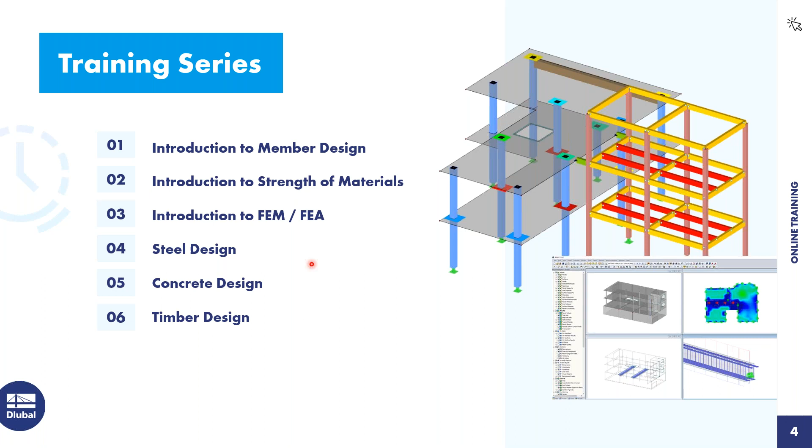Our training series has 6 parts. Today is the 5th part, the concrete design. What can you expect from today? First of all, we start with an introductory example - we will model together a concrete beam with a cantilever. Then I will forward to Juliane, and she will show you how to design our concrete slab.

So let's jump right into it - no theory, only modeling in RFEM 6. I will open this example and create a new model. I'll go to File or click here on New Model, and now I create in this dialog a new model with the name concrete beam. I will leave it here as a 3D type of model, and everything else is set.

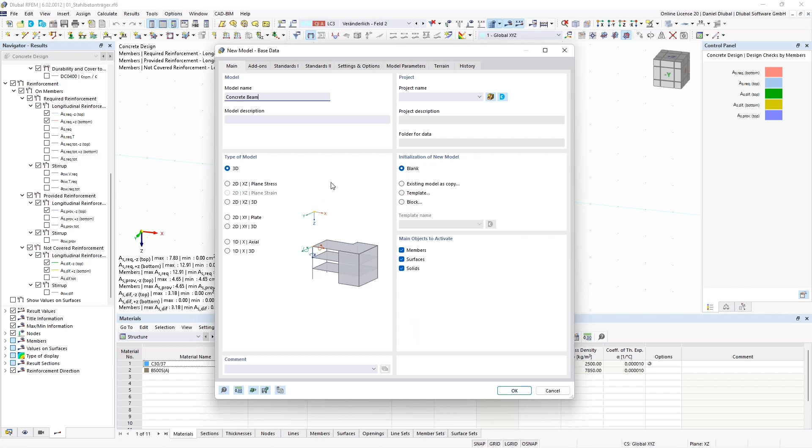Now for me it's important to activate the add-on concrete design. So here we go to the design add-ons and activate concrete design, because then we get additional design properties for our concrete beams or concrete slabs. When I have activated this, I go to the 3rd tab, Standards. Here I see different chapters like design, standard group, load results, and load case classification. I want to design it according to the European Eurocode, with the national annex of Europe. I will leave it like that and just click OK.

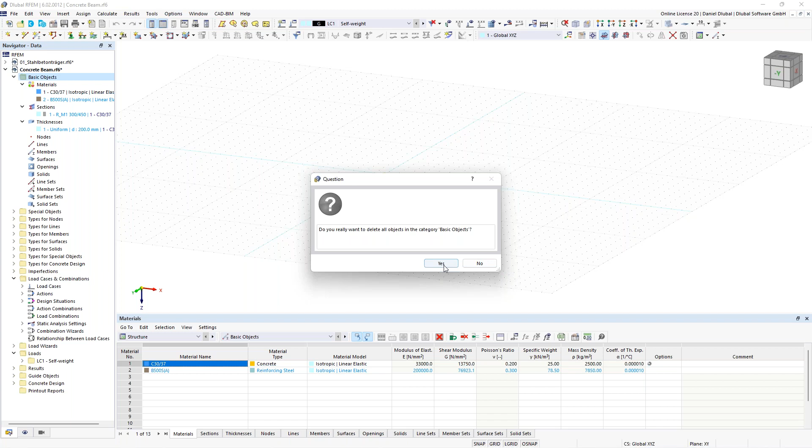A new window opens, and as you can see on the left side, I already have some materials, sections and thickness remembered from the last project I did. So I will delete them in order to create all these 3 things anew, just to show you how to do it. You can right click on basic objects and say delete all basic objects, and now we can create it from scratch.

Before we do this, I would like to know from you if you already have some skills in concrete design with structural analysis programs, just to give me a kind of status about your knowledge regarding your concrete design skills. So I have prepared a poll, which I will start right now. Please answer these questions to give me feedback about your knowledge.

Okay, now most of you have voted. I close this, share the results. Most of you have already designed concrete structures in a structural analysis program, I hope it was RFEM 6 or RFEM 5. For those who don't have this experience, that doesn't matter, you'll learn it today.

Back to RFEM. Here on the left side in the data navigator, I will create two materials, because for concrete structures we need two: one concrete and one material for the reinforcing steel. I go to new material. One of the biggest advantages in RFEM 6 is that I can search for a material via this text box. I enter C30/37. I am from Germany, so I will design it according to the Eurocode, since this is the only standard I know, and this is why I choose this one.

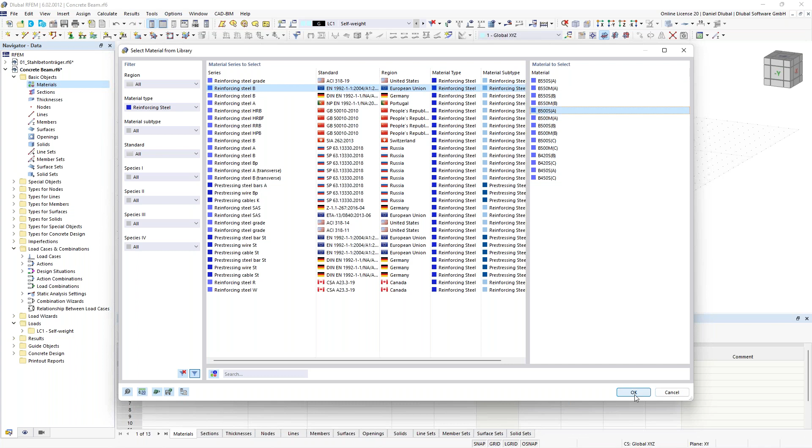Next, I create a new material again. Here I go to the material library and look for the material type reinforcing steel, filtering according to different material types, and the one I'm looking for is reinforcing steel, in this case reinforcing steel B. I see different things here: B500 or 550 is for the yield strength, A and B is for the ductility class. A is the normal one, B is the high ductility, and S is for the normal member reinforcing steel, M for the mesh reinforcement. In this case, I choose B500 SA, click OK, and that was it. I click OK again.

Next is to create a new section. Because we will model and design a concrete beam, I click on section, new section, and choose this rectangle massive cross section, or when you don't have this, go to the cross section library and choose this massive rectangle. Then I give the geometry: a width of 300 millimeters and a height of 450 millimeters. I can see the section values according to this geometry and also the stress points, and if I want, I can show the unit stresses. In concrete design not so important, but we have implemented this too. That's everything, I click OK.

Thicknesses, I don't do right now, this will be more the part of Juliane, because she will show you what thicknesses are. Thicknesses are similar to the cross-section things for members - this is the similar thing. Thicknesses you need for surfaces, and sections for members.

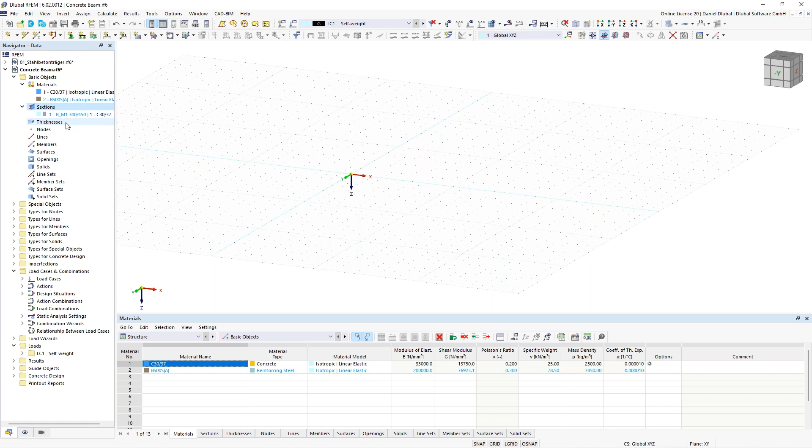Now we will model the beam together. I go to the symbol bar, click new single member, and choose the right section since I have only one. I click OK and draw this member 8 meters long, either via the grid points or by inserting a member length like 8 meters. As you can see, we already have the provided reinforcement based on some general information about this concrete beam, which we can modify afterwards.

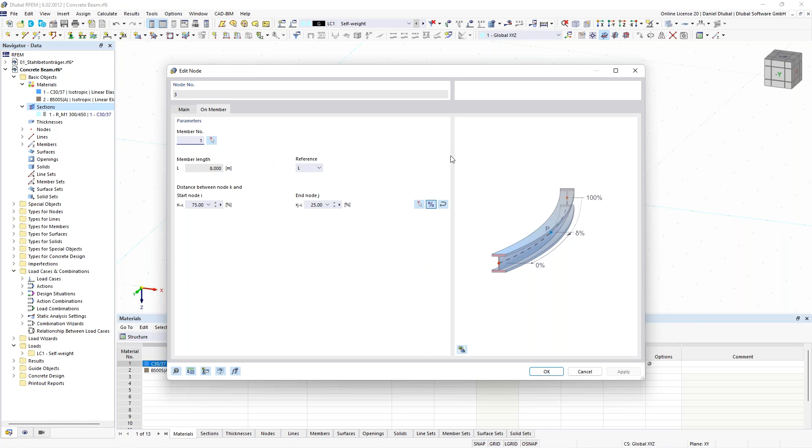What I want to do now is divide this member internally - the member remains as one member, but we add an internal node. Double click on the member, activate the option nodes on member, and switch to an absolute distance. I say from start, 6 meters away, and here you should create a new node. I click OK, and you see this blue node. Double click on this node - it has the node type 'on member'. This is a nice opportunity, giving this node the option to be part of this member without dividing it.

Okay, next thing: supports, node support. I create a new nodal support. I also want to activate the rotational around the global X axis to prevent torsion, and then a roller support along the X axis. This is this one. I click OK. So much to the modeling.

Now let's go to the load cases. I go to the symbol bar, edit active load case, and here I have the self-weight - this is okay for me. Now I want to also consider an imposed load case. In this case we have two fields, one field and a second field. I create the first one: this is imposed load field 1. Now I copy it and create field 2. I choose load case 2 because then I jump to load case 2 where I set some loadings.

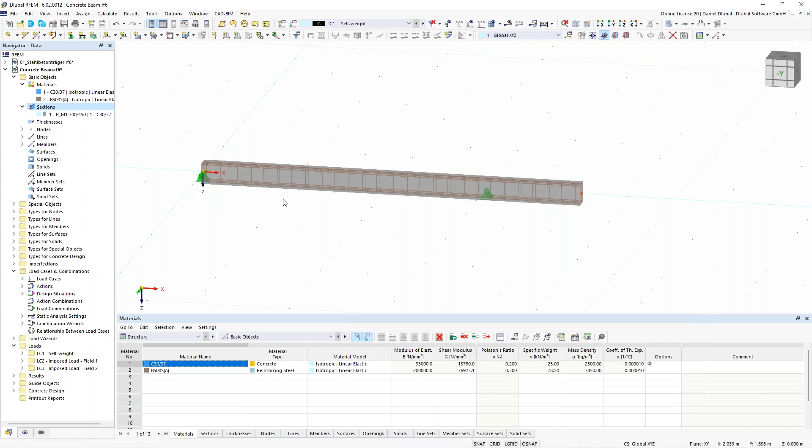The whole concrete beam has a member load of 10 kilonewton per meter. I click on this member load and insert a value of 10 kilonewton per meter.

The biggest advantage now in RFEM 6 is that I can stay here in this dialog, just select the same member, and then afterwards just change the load case and add the parameters like the load magnitude again to the members. I don't have to leave this window. This is a real good advantage.

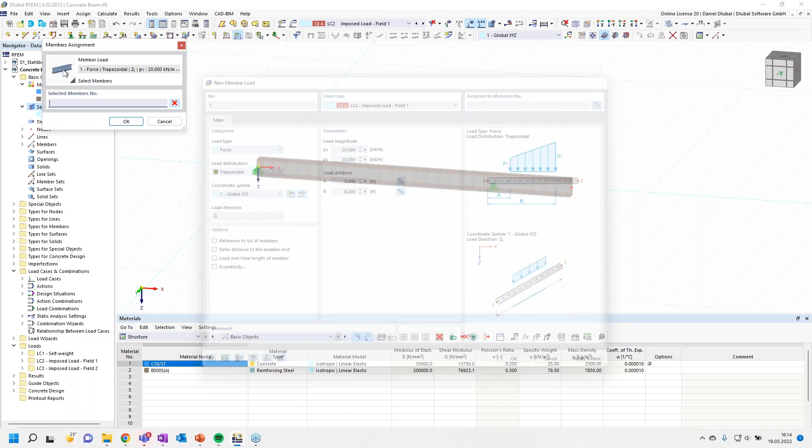So I click here this member, say apply and next. Now I change the load case, and now I have to change the load distribution because we only want to apply the load on the left field. So I say trapezoidal. Here in this case, I have 20 kilonewton per meter, 20 kilonewton per meter on the right side, and the load distance goes from 0 to 6 meters. I say in this member, please apply and next. Now I change the field and say from 6 to 8. I can insert here 1, say okay.

Now let's do a check. Okay, seems good. So back to the load cases, maybe a few words to that. We have here this load case classification according to this European standard, according to the Eurocode, and we have also here this combination wizard, and this combination wizard helps me to combine different load cases with each other, considering the partial factors.

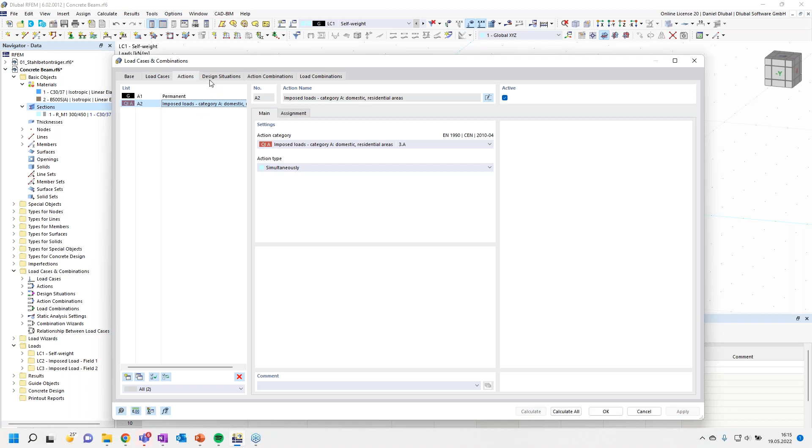Now we see it here also, we have here these different actions, and depending on these actions, it will also get me the right factors for combining it, and according to the design situations, it will combine it. So you can also take a closer look about the combination rules, like here.

For our simple example, we don't need so much design situations. So these two serviceability design situations, like characteristic and frequent, I will delete. I only need here this ultimate limit state and this serviceability design situation, quasi-permanent. Let's go to the action combinations. Here, these are the factors I need for my load combination. Okay, good, this is everything.

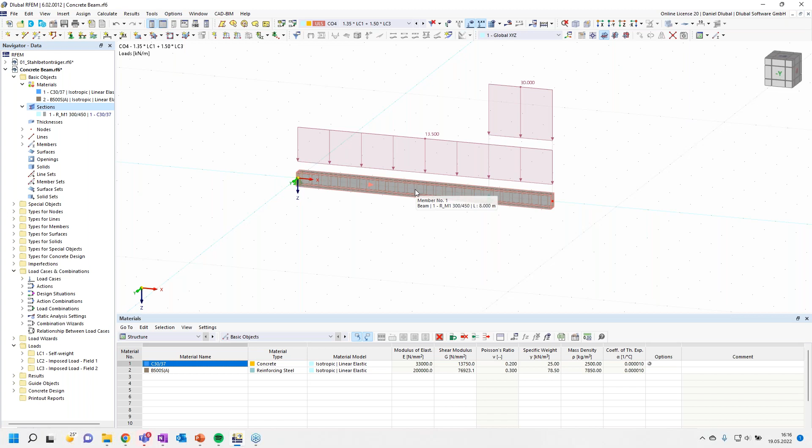Now click on OK. Now I need to define my design properties for my concrete design. So where can I do this? Double click on the member of this concrete member, and now you see here the design properties. When I have activated the add-on in the base data concrete design, then this option will be activated automatically.

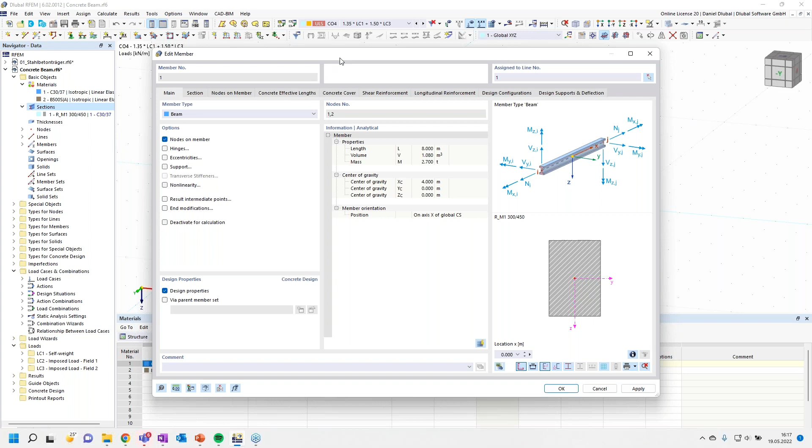I can also deactivate this, and now you see, okay, all these registers here in the upper menu will disappear when I deactivate it. The other tabs are there. So what do we do now is that we go here these tabs through. What we don't need is the concrete effective length for any stability proofs, but this is a classical bending member, so I can neglect this.

So I go here to the concrete cover. The concrete cover is pretty clear. You have different exposure classes in order to determine the concrete durability. So you can open here this. Now it's for all section sides. You can modify it. You see here this different exposure classes. Here you have this XC1 up to XC4 due to corrosion induced by carbonation.

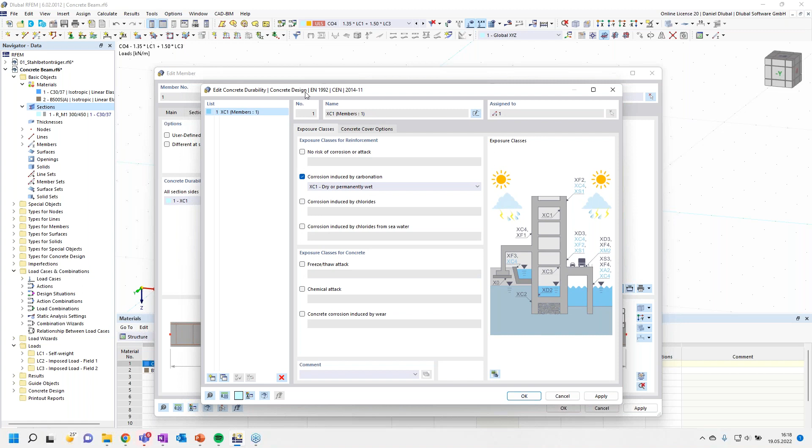Or also here when I want to consider exposure classes for concrete, freeze, thaw attack, and so on. Through these exposure classes, the minimum concrete cover is determined. So for our simple example, this simple XC1 is okay. I say okay again, and this minimum concrete cover is determined from the outer edge from the concrete rectangle to the outer edge of my stirrup reinforcement. And these are 20 millimeters, determined by the exposure classes.

I can also say a user-defined concrete cover, or when I want to consider it for each side differently, I can activate here also this different at section sides. Okay, so much to the concrete cover.

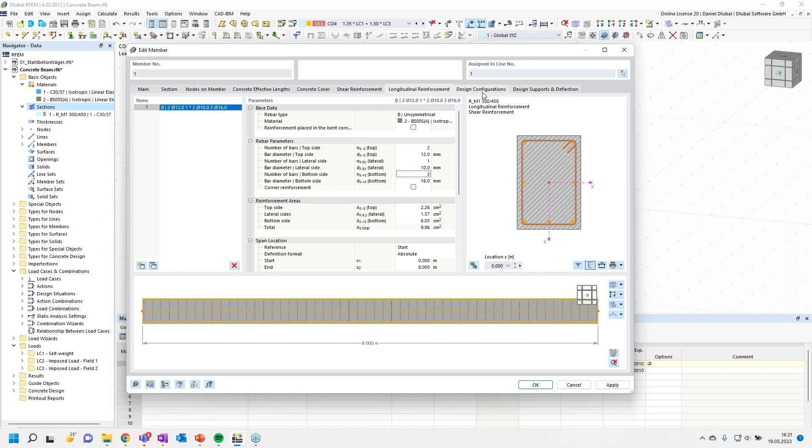Now, design configuration. Here you find more information about the different design parameters, like considering internal forces for concrete design, and also the reduction of internal forces in Z direction. In this case, I activate the limited moment redistribution of the supporting moments, and also the reduction of the moments at the face of monolithic support according to this standard.

So here you can define also several other options for the design of concrete. These are the information given by the standards. Okay, and the same also for the serviceability, but this is some more information.

Now the last tab is the design supports and deflection. When you want to design the deflections, really the deformation proof, you have to define here different design supports. We do this for this simple beam. I create here a new one with a support width of 360 millimeters, and it's no inner support, only support in Z-axis.

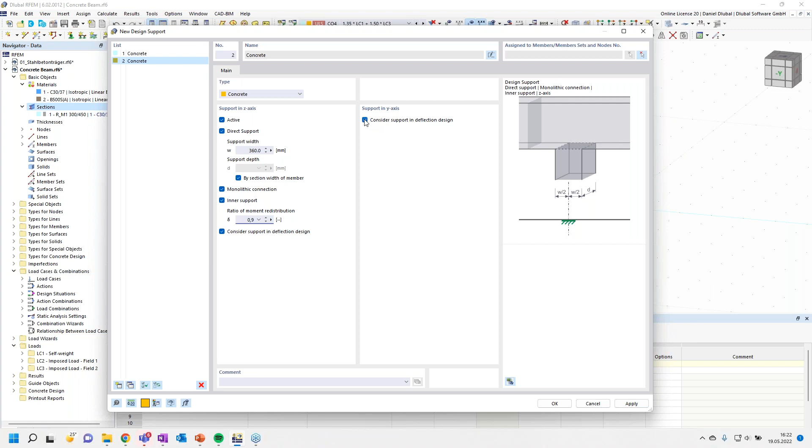And that's everything. Now I create a new one also with 360 millimeters. It has a monolithic connection, and the ratio of moment is in this case 0.9, and I don't need to consider any y-axis. I click on OK.

Now I have to assign it to the right nodes. So that is on member start, this is correct. And now here to the middle, the second one. Oh sorry, no this is not correct. Now this is correct, I say OK.

And now I can calculate it, let's say concrete design. And now you see, okay, how the whole situations are calculated. Also for the serviceability.

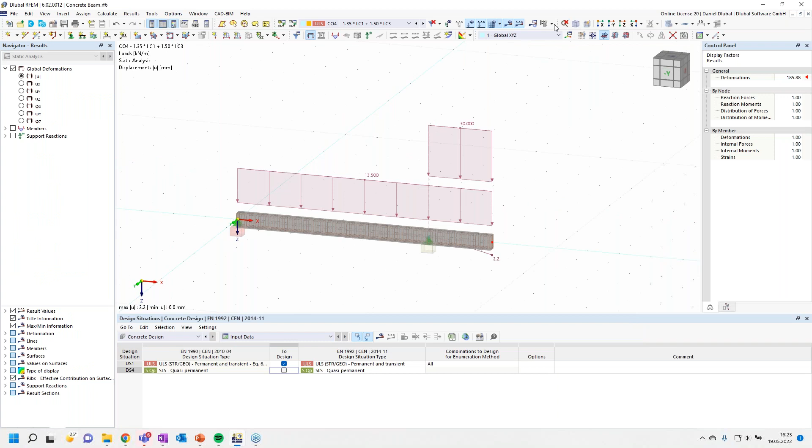And what I don't need is to design for the serviceability limit state. I only am interested in the results of my ultimate limit state. So I calculate the concrete design again.

And now I see here the different design ratios for members, and I see detailing of members and also the ultimate limit state. Section resistance is not fulfilled. So what can I do? I need to strengthen my reinforcement.

Maybe some words to this reinforcement. Here on the left side, I see the results navigator, and here I have the possibility to show me different results, like the reinforcement. So I see here the required reinforcement. Maybe I deactivate the design check, I can show me the required reinforcement for the top and the bottom.

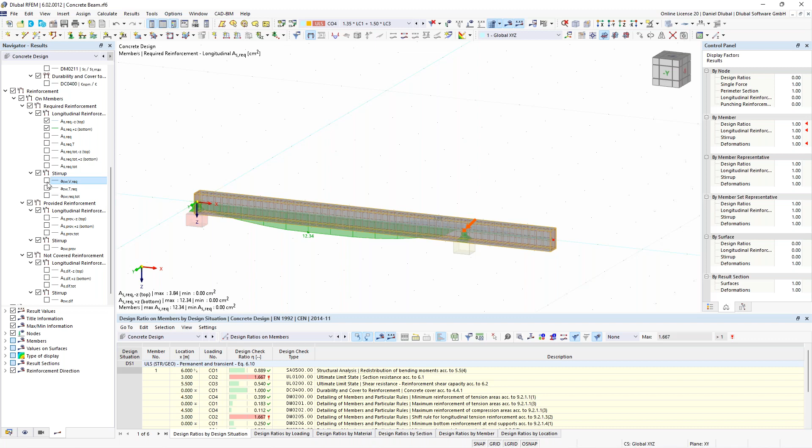For the top and the bottom reinforcement, I can show me also the stirrups and also the provided reinforcement for the bottom side. And I can deactivate here the rendering of the reinforcement by going to the display navigator, to types of concrete design, and deactivate it. And now I can see the result a little bit better.

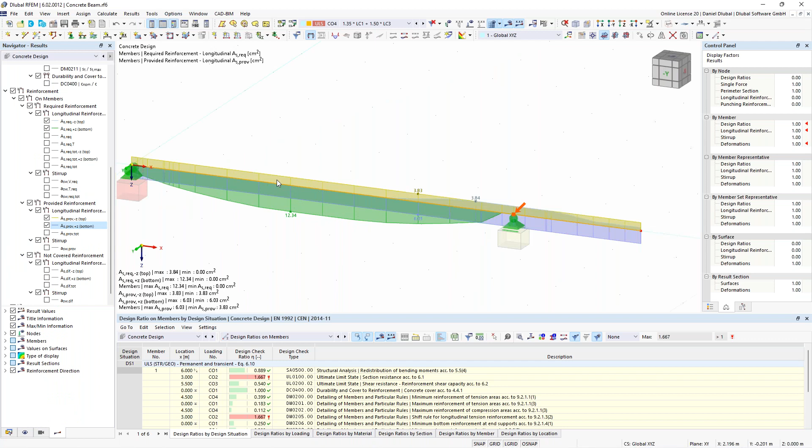So I see, okay, my provided reinforcement is lower than the required reinforcement, so I need to add some more rebars. And in order to calculate the difference, what I need, so the not covered reinforcement, I can also show it.

Okay, so what can I do? Go back to the concrete beam, go here to the shear reinforcement. Now we want to add more rebars for some places. So I go here and copy it. And now I want to cover it for different fields. So you see, the start and end goes from 0 to 4. I say, this should go to 6.

And this one should go from... sorry, this should go from 5 to 7 with a distance of 0.1 meter. And the other one should go from 7 to 8 meters.

And the longitudinal reinforcement, let's make it quite easy. So what I can do here is just increase the diameter for my top side, and add here a diameter for the bottom side to 20 with 2 bars more. And it looks like that. I can show me also this reinforcement plan by clicking at this icon, and I see it here like that.

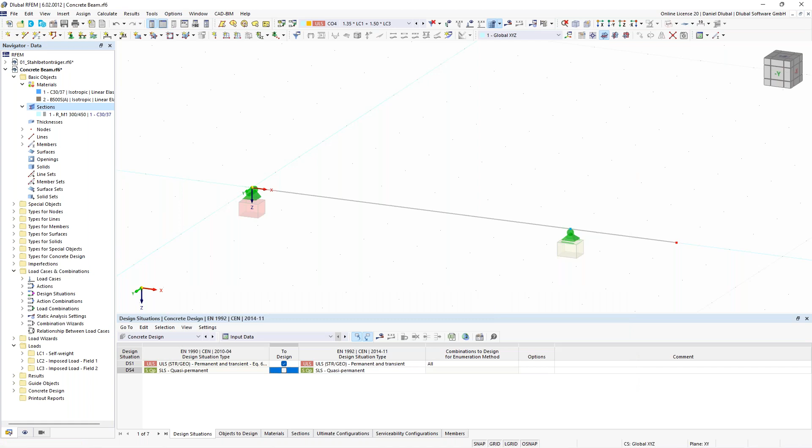Then I click OK, I design it again. And now I see here my fulfilled example, my fulfilled design check ratios. And by clicking on one of this, like this one, you see also here this design check.

Also, you can switch here to different design checks. In this case, we have the design check according to this standard: shear resistance, reinforcement shear capacity. And when you are studying and want to compare your results with the results of our program, you have here an overview of how the program did this. Okay, so much to the beam design.

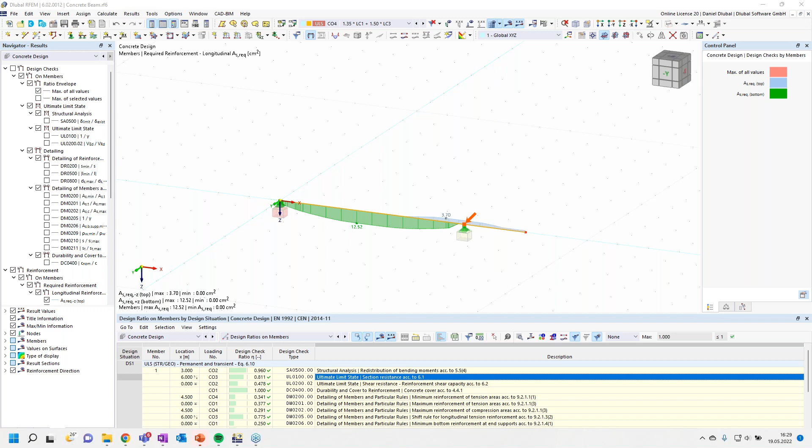The parts of the structure will be of material C30/37, and the wall and columns will have concrete C25/30. We will have self-weight as a load and also apply a live load of 3 kilonewton per meter square. Then we will again do the load combinations and let the program generate them for us.

After that, we will do the analysis and use the results for the concrete design. So this is it so far as preparation. Now we can go into the program and start modeling.

I will open a new model with this icon and get into the base data dialog. I enter the name - it will be a slab, made of reinforced concrete - as additional information here. The other settings we don't need to change.

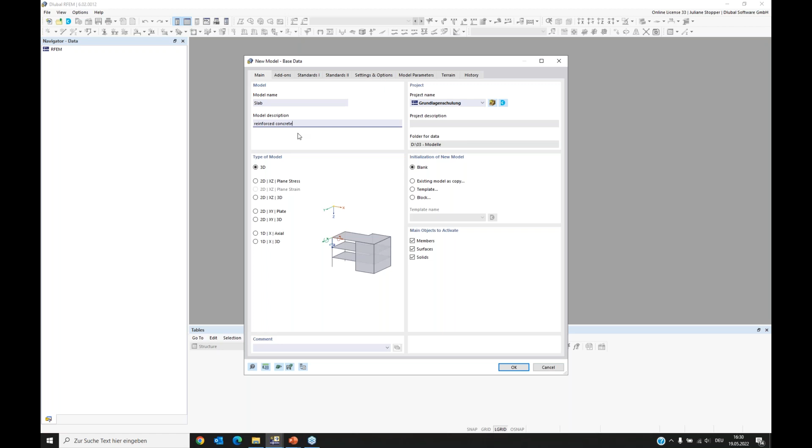Again, we have to activate our design add-on, the concrete design, and in the standards I also want to keep the National Annex CEN as Daniel did. So we can agree and say okay, this is fine. Now an empty model is prepared for us, and we can start modeling.

I would like to use a guide object with you - a background layer. We have a drawing from the architect in DXF format, and we can use it as an orientation to create our RFEM 6 model.

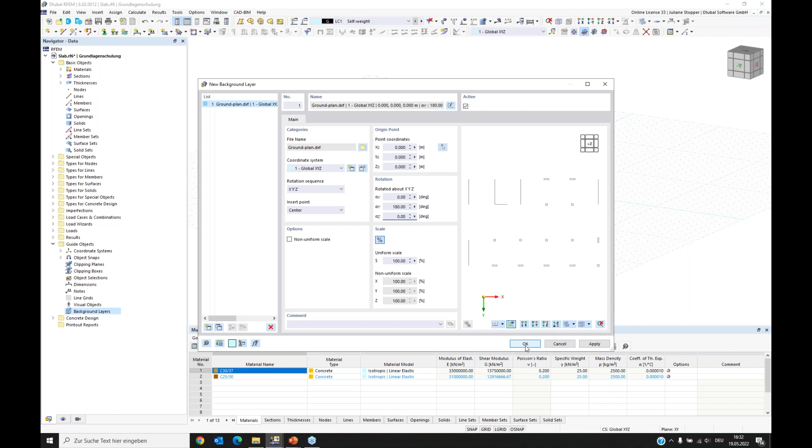I have to get the file from my folder where I put it, and here is the ground plan for our slab. We have the preview, and checking it, I can see I need to rotate it with an angle of 180 degrees around the y-axis. Now in my preview I see this is what I wanted - positioned like this as a background layer. So I can say okay, and I have it in my model now.

So all these lines are DXF objects. Now I need to create my objects that I can use for the RFEM 6 model and the analysis. First I want to start with the lines - I will create the boundary lines for the slab. We have one here, and we have one here.

If you want to end any process you are in, you can do it with right click, and you can leave the thing you are currently doing.

Now I want to copy this line. I select it, press Control, click on the line, and draw it to here. I will do the same with this line - press Control and put it here - and I've finished my boundary lines.

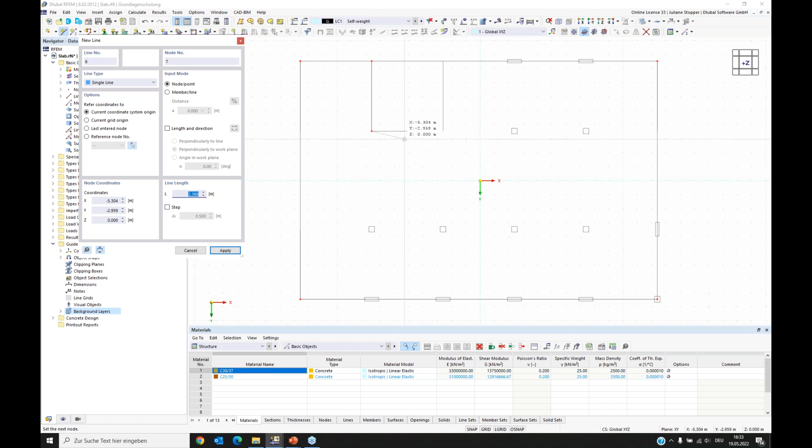Then I also want to have lines here, because the lines we see are DXF objects, and I need to have parts of the structure modeled with RFEM 6 objects.

So what I also need is nodes - I need nodes for the places where the supports or columns are placed. I'll put some nodes, doing it here. I can see that I need an X value of 2.40, but I cannot reach here correctly, so I put this node here, and I put another one here.

And now I can edit this node. I double clicked on it, and I can see the coordinates here. And as we saw, I need 2.40. I can say okay, and it goes there.

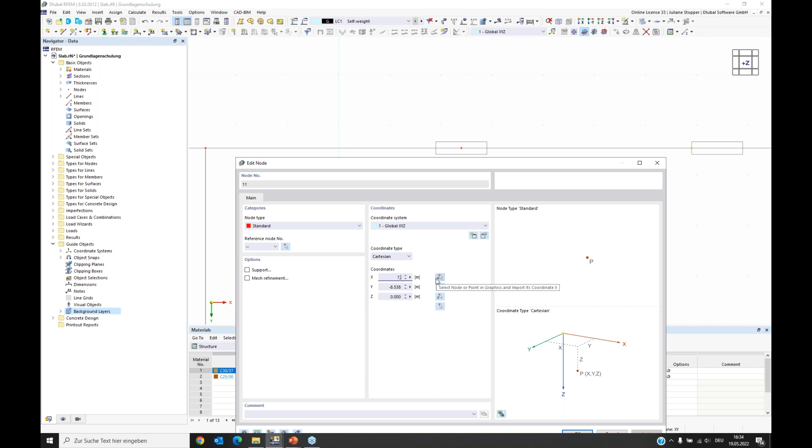Here I checked it, I need 7.40, and then it will be at the right place. So now I prepared the nodes on that line, and I need them actually in this line, and this axis as well.

So I have to select them. I want to copy them. With pressing Control, I can again and again add the selection. Now I want to use drag and drop. I again press Control and I can take the node and copies are created, and I can put them at the place where I want them. Here's the end of the wall and it fits.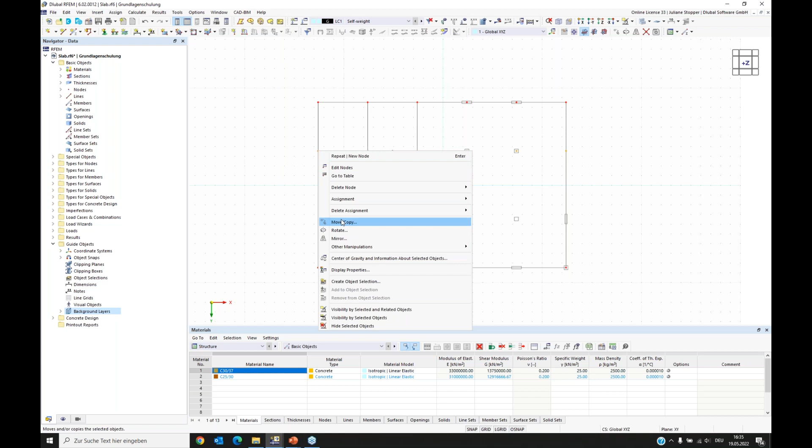Now I can see the newly created nodes again are selected, so I can go on with them. Now I want to show you this menu. I did a right click on the node. I also can use this move and copy option.

I say I want to create a copy and I have to give the displacement vector here. And now I want a vector like this. I can say apply, and I can see the program copied it, and I can repeat this and do another copy into this row and say OK. Now I see I have all the nodes that I need for modeling.

Now there is one thing I want to do. I want to divide this line into parts because when I want to define the surface, I want the surface to be within these lines. So I shouldn't have a line that is not divided.

So in order to do this, I select all my lines and I can use this option here. Now every line is divided at the nodes or lines that it's connected with. Okay, now I prepared the first step of the geometry.

Now I also want to use the data navigator and work from top to bottom like this. At first we want to check the materials, have a look at the list. I also have the first two materials from my last model, and I want to use them with you. It's the C30/37 and also the 25/30 that we need.

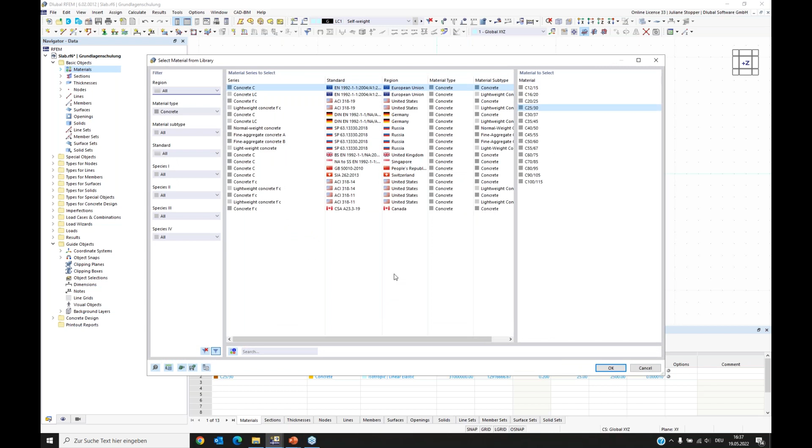I checked the standard because it's important that the standard fits to the standard you selected at the beginning. But it fits, I have the right standard. Okay, so now my material list is fine. I can say OK and leave this dialog.

Then we can go to sections. And I also want to delete it so that we can create it together. We create a new section, and it's right, it's going to be the section of our L-beam, and it has the same material like the slab.

And here we have provided cross-section types for beams, and we are right, we want to use the rectangular. We can go to this dialog for entering the dimensions.

Now I will show you. We want to create our L-beam, so we have 24 centimeters and 45 centimeters in the height, and we can enter this: 24 centimeters and 45 centimeters, so 450 millimeters.

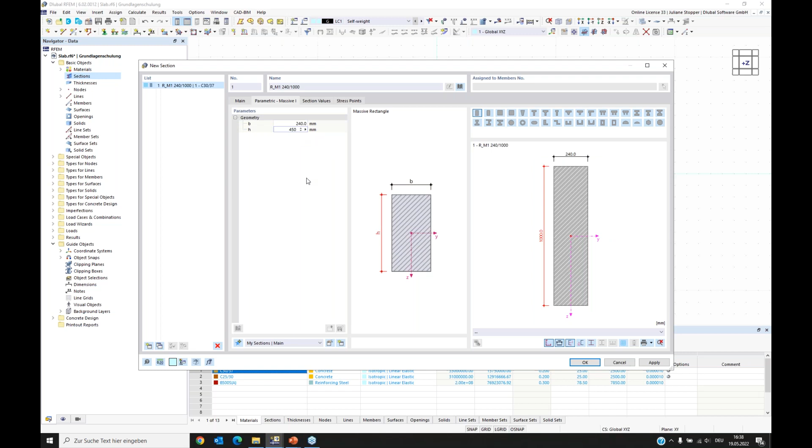Okay, then I have my section prepared for the L-beam. And I also will prepare the thickness that I need for the surface. As Daniel said, for beams, for 1D members, you need 2D cross sections. And for our surface, which is a 2D member, we need only to define the third dimension, the thickness for it. So we can go here.

We have the dialog for the thickness. It shall be a uniform thickness. This is right, it's the material for the slab. It's also right, but it has to be 24 centimeters, so 240 millimeters. Okay, and I say okay.

Now I prepared my cross sections, then I can go on with creating the surface. I could do this from here, but I want to use an option we can reach here more easily. We can define a surface via the selection of boundary lines, and this is what I want to use now.

Here we see the dialog for the surface. Here we can enter all the things, all the options the surface has, all the settings and input the surface needs. And it shall be a stiffness type standard. This is good, we have the right thickness and the right material. And as we can see, because we applied the concrete design add-on, we also have design properties.

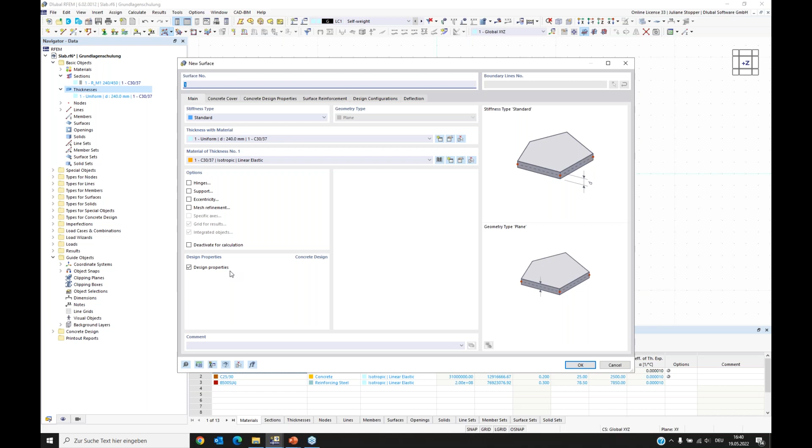Those I want to have a look with you at later. Okay, so we can agree. And now the program, if we go into our working window, the program tells us what to do. You can read it here.

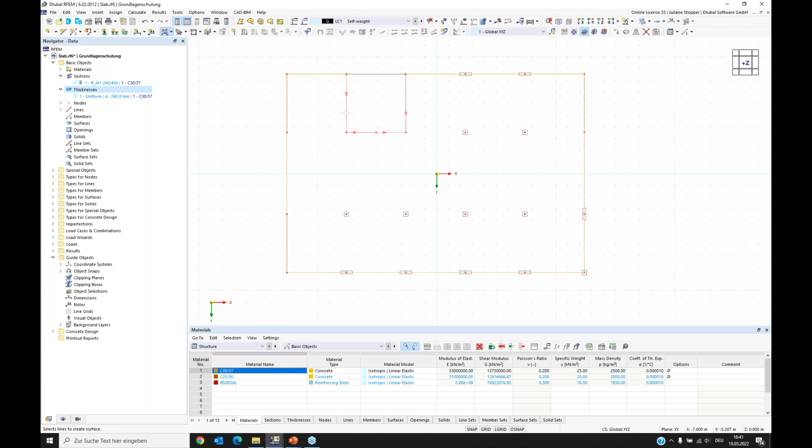When I go back with my mouse into the field, we can see that now we are supposed to select the lines for creating the surface. So I just select the lines, and Rfem 6 created the slab, the surface. Okay, I can leave this. I do a right click, and now I'm free again.

So now I want to create the L-beams. The L-beams are positioned everywhere where no wall is positioned at the border lines. So I select all the lines that will get or receive an L-beam between the columns. Here's going to be a wall, so I go on here. We have a wall here. Here shall be an L-beam, and here are going to be walls. So my lines are selected.

I can do a right click on the line and say edit lines, and I come into the dialog for editing lines. And here I have the option to say that for these lines, there shall be a member along these lines. And then we activate it, and when we activate it, we get into the dialog for defining the member.

And here we can see the member type we have to set in the main window. And we have a special member type for L-beams or T-beams. It's called RIB in Rfem 6, and I select it. Here you can see we want this type of member.

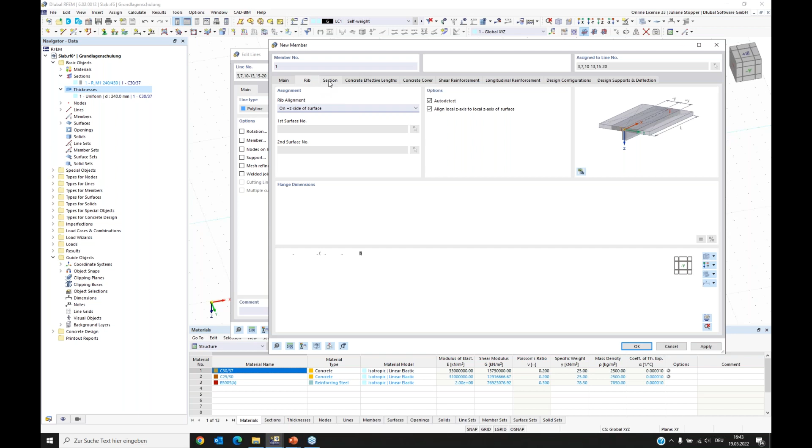We go into section. We have to define the section for the member, for the part below of the surface. And Rfem 6 automatically applied the first cross section that we defined. So this is the right one. This is the one we defined, and the material is right as well.

We can say okay. What I want to do is switch off the design properties, because today our main object, our focus is on the slab, and we don't want to analyze the design for the RIB as well. So I can switch off the design properties. The program then knows that these RIBs shall not be considered in the concrete design. And I say okay and leave this dialog.

And now all these lines have these members that we defined applied, and we can see it in the main window. Yeah, now we finished actually the structure.

As I said, we want to have the design for the slab. So we are actually not interested in the inner forces or stresses or strains in the walls or in the columns. That's why we don't need to model them. We have a special type of supports that I want to show you. At first, we go into the types for nodes. Here we can find nodal supports, and I want to create a new one.

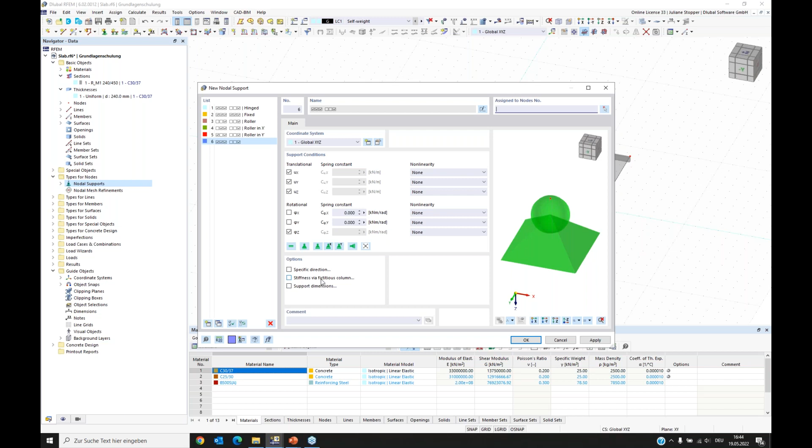We have in Rfem 6 the option to give a support that contains the stiffness via fictitious column. This means I can activate it, and then a new register is opened and we have a look at it. Here we can enter the dimensions and the material of the column, and Rfem 6 from this information calculates the stiffness the column has. So we can model a support that behaves from a point of stiffness like a column behaves, but we don't need to model the column, and we don't get inner forces or something. We are not interested in it.

So I can choose here elastic nodal support. This is what I want to have. Our column has dimension 40 centimeter and 40 centimeter in the other direction, and it has a height of 2.25 meter. Yes, and it is hinged at base and head, and I have to take care - I should change the material. We have less stiff material here, and this is the stiffness of the spring the program calculates from this column dimensions and material.

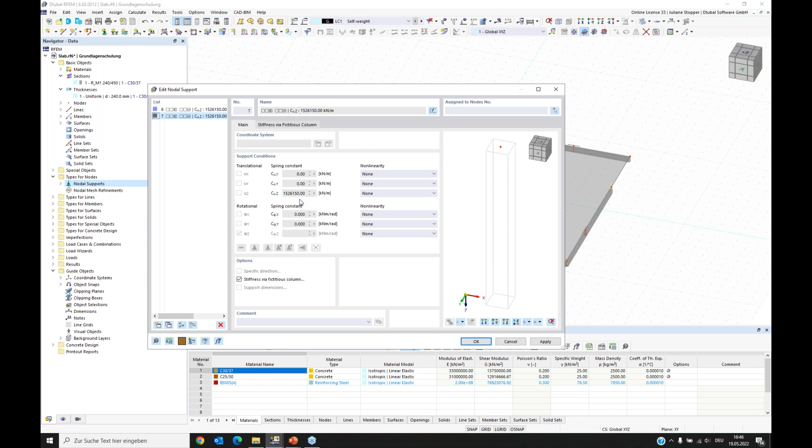It fits 25 centimeters in height. The height of the column is 3.25 meters. This is right, and the other settings we can keep. It's right from the copy.

Okay, and I can apply these columns here, and say apply again, and I can create a last copy. Here I change only the width and height, and I can apply or assign this to this node.

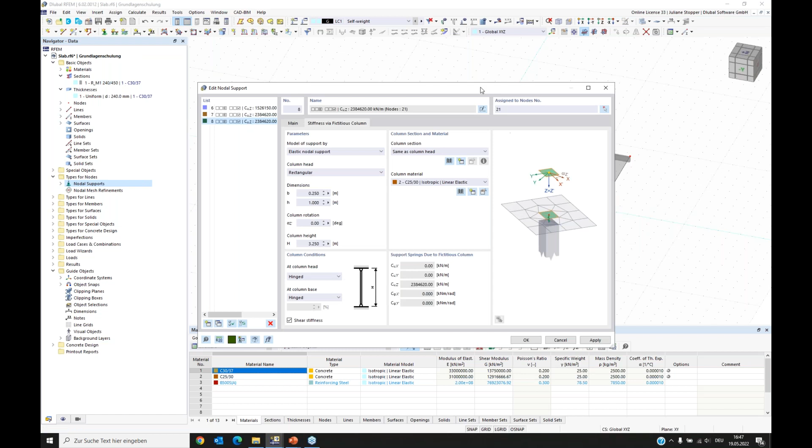Now I have all my different types of columns defined, or the supports of them, and we can see it here. I can also change the display of the model. I can say I want to see a wireframe model. Then we can see, for example, the supports more clearly.

And if you think the supports are a bit small, you can right click on them and make them bigger. Then it's easier to see them and check whether a support is everywhere one is supposed to be.

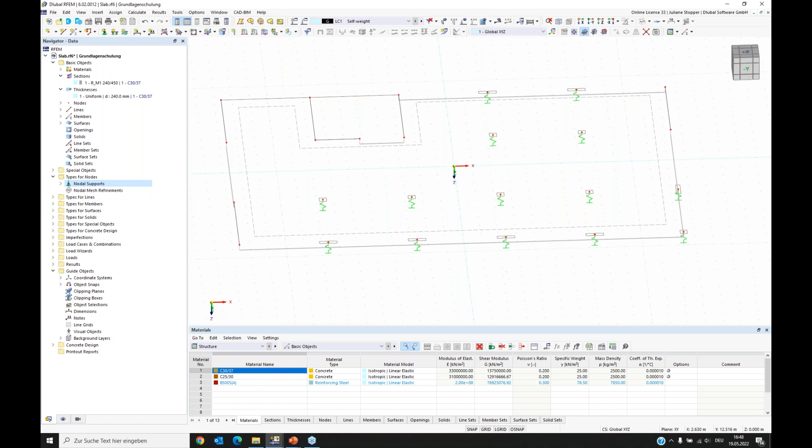Okay, we have the same tool for walls. We can consider the walls as line supports. So we can now go into the folder types for lines, and here we have the line supports and can create a new line support.

Here I have the stiffness via fictitious wall, and I can only reach this option if I activate the local XYZ coordinate system. Now you can see it's possible to activate it, and we again have to define geometry and material. The wall has a thickness of 24 centimeters and again a height of 3 meters 25.

The material also shall be material number 2, and now the program calculated the stiffness that resembles the wall. The X direction is the direction along the length of the line, so we have a stiffness in this direction, and the Z direction is the vertical direction. We have also this spring.

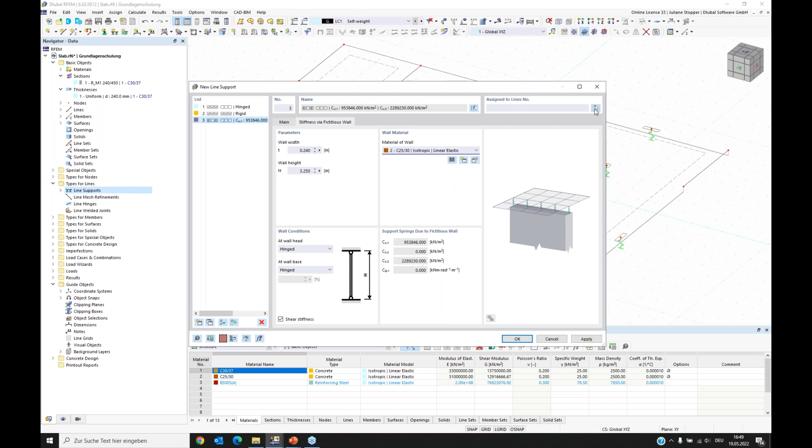Okay, now we can assign it to the lines where we have actually walls, and they are these. And here's another one, and I think it's completed. I can say okay, and we are now fine.

Now we have all the supports that we have from the walls and columns. I again go to the transparent model, and I can see our structure. We have finished the structure now.

What we need is the loads. So we can close here the settings for the structure and go to the load part. At first we enter this load cases and combinations dialog. Yeah, and again we activated the combination wizard as you saw with Daniel.

Now we can go to load cases. We have as a default load case always load case 1 as a self-weight load case. You can also see here the self-weight is active and it's a permanent load case.

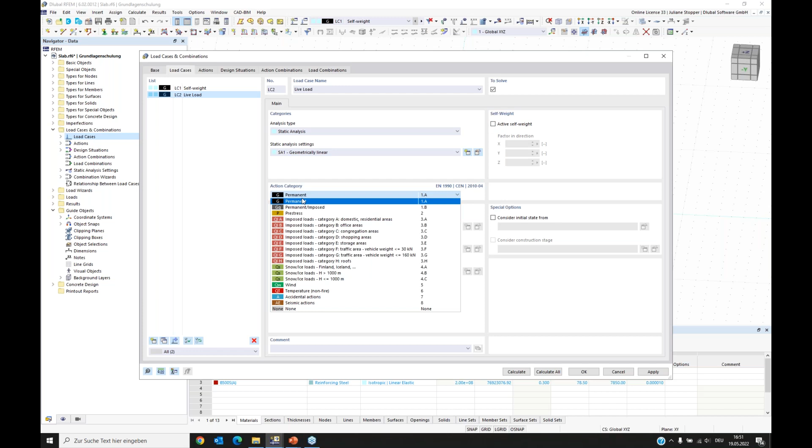And we want to create another load case. This is the live load case. And here we don't want the self-weight to be active, and it has to be an imposed loads load case. It's important that you take care about defining the right action category, because we will do the action combinations.

The combination wizard is going to generate them for us, but it can only do it right if you set the right action category. So we have a permanent load case and an imposed load case.

Okay, then we can have a look at this. Here you can see which type of action categories you have in your model. This helps when you have a lot of load cases in bigger models to keep an overview.

Then we can go to design situations. We have those prepared for the concrete design. And I want to show you also the combination wizard. Here you can do settings for how the combination wizard shall combine or create the load combinations.

And I want to use the geometrically linear analysis. I activated it here, and we don't need to consider imperfection cases. So I can set it okay, and then we can go on.

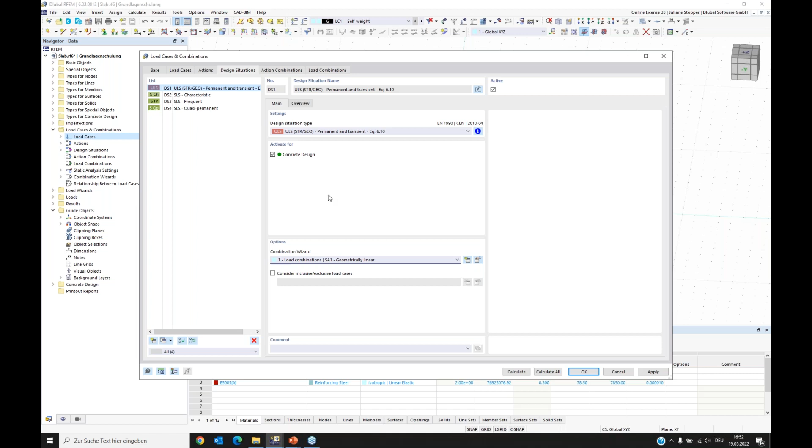We can check the action combinations and see also the load combinations that are generated from that. So now we finished that part. We have the load cases and the combinations. Now they are prepared and we need to fill them with loads.

We have this folder loads here, and we can see our load cases, but they need to be filled. We need to say what kind of load has to be contained in live load. In self-weight, we have a load because we said self-weight shall be active. This means the program calculates from the cross sections and the specific weight of the material, the self-weight of the structure.

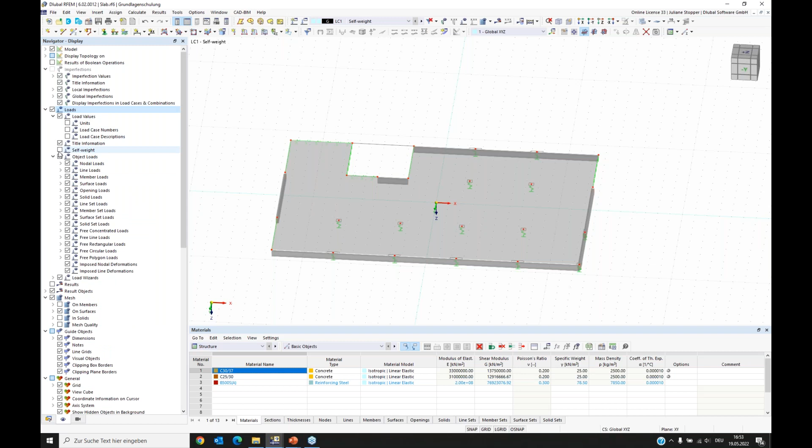So we can have a look at this. I switched from data navigator to navigator display, and here we have the option to activate loads, and within the loads we can activate the self-weight. Then you can see for load case self-weight what the program calculated for the construction parts. So we can see load case 1 has a load.

Now we can go to load case 2 and we see we don't have a load yet. So we create one. We create a surface load with right click and say new surface load, and it's supposed to be 3 kilonewton per meter square, and we apply it to surface number 1, and it's okay. And we can see now also we have a load in our live load case.

So I want to save it once. It's good to save from time to time. Now we prepared our model. We have the structure, we have the loads, we have the geometric boundary conditions. Now our model would be ready to do the finite element analysis. We could calculate the stresses and strains, the inner forces and displacements for this structure.

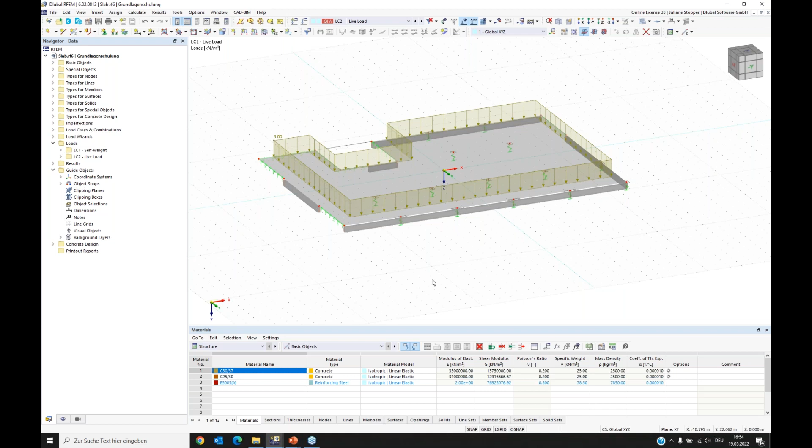What we want to do as well is the concrete design, so we have to define the properties for the concrete design. I just double click on the surface and we can see all the design properties that I can set for this surface. Now I want to have a look at them with you.

Here we have the concrete cover. I think Daniel said a lot about it. It's fine, we can go on, I think.

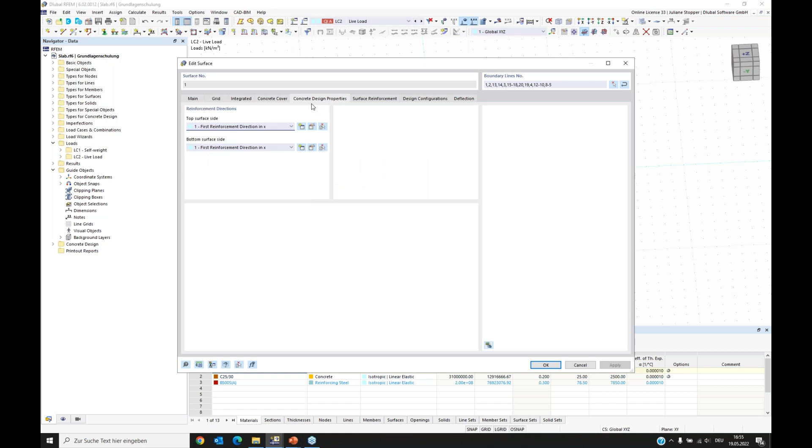We have for the surface the option to set in which direction the first reinforcement direction has to be. For us it's now X, and the second one is in Y direction. Then it's okay for us, we can go on. Now we have the register for surface reinforcement, and we see that our list is empty.

So we have to define a surface reinforcement, and we can do this via clicking here. And then we have the dialog for defining new surface reinforcements. Here we have a surface reinforcement of the type on surface. This means the surface that is assigned will get this reinforcement everywhere, independent of the geometry of the surface.

I want to, at first for the top, define a reinforcement of 8 millimeters with a distance of 15 centimeters, and in the transverse direction also 8 millimeters with the same distance. The program tells you how much centimeter square per meter you put, and yeah, it's fine for me.

I say apply, and I copy this reinforcement because I just put it at the top. I want to create the same at the bottom for now. I generated, I entered two different surface reinforcements for top and bottom, because I can imagine that maybe later I will change one of them. They don't need to be the same.

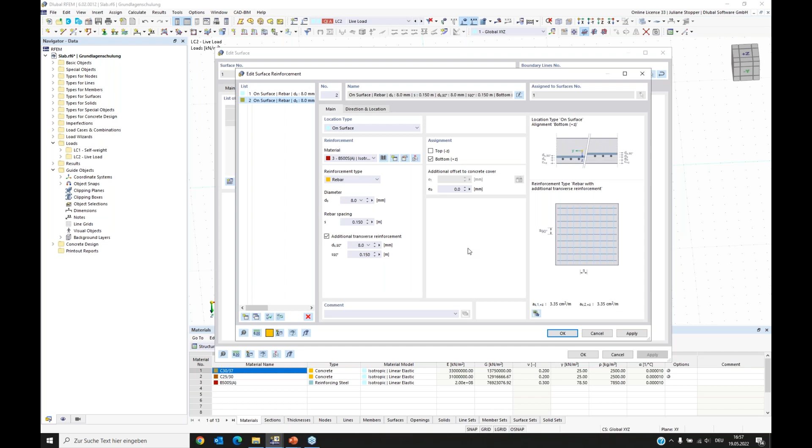So I can say okay, and now my surface has a reinforcement. Then we again here have design configurations. We can have a short look into them.

With Daniel, you saw those. We can have a look at the surfaces. This is something you should have a look at. For now, for us, we keep the default settings, but you should know what is decided in here. For example, now we have minimum longitudinal and maximum longitudinal reinforcement defined for plates or for slabs, which is fine for us.

But if you want to make the design for a wall, you should apply design configurations for walls and this setting for walls. Yes, but for us, for now, it's okay. I can say okay and keep the default setting.

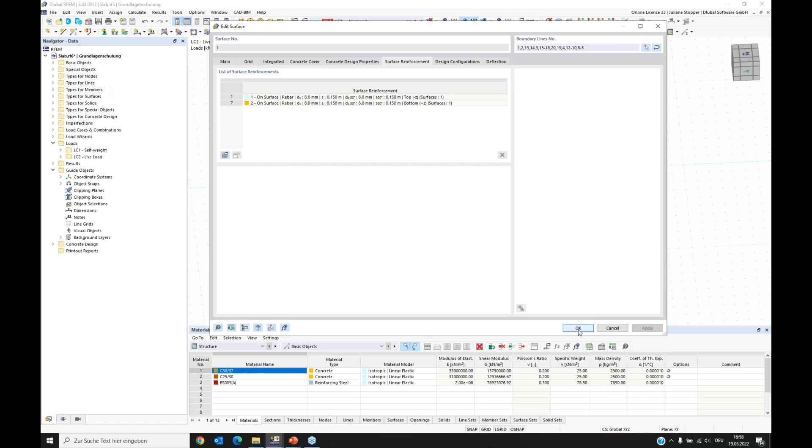We have something similar for the serviceability state. Yeah, this is what I wanted to have a look at with you for now. We defined our surface reinforcement, and then I close it. And now we also can see it in our graphics.

Here I can switch off the loads. So now I can see that my reinforcement is contained in my surface. So this is it for us. We can now start the analysis, and I want to do it from here.

We can here choose the concrete design in the table, and here we have our input data. And for now with you, I want to just do the ultimate limit state analysis, so I switch off those. And also in the objects to design, I want to say that I only want to solve the surface.

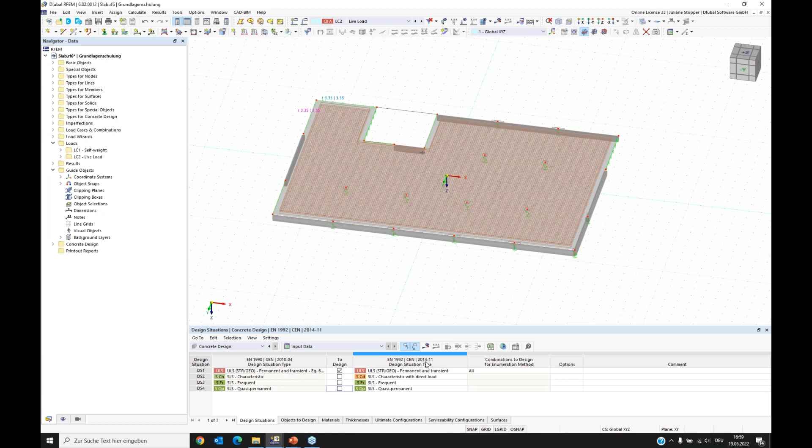Actually, the program sees that the ribs, which are members, cannot be calculated. They are invalid because they don't have a reinforcement, so they wouldn't be contained in any way. And also I switch off the nodes for punching. So we have our surface. Yeah, and we did these settings. Now we can start the concrete design from here. And I started.

The program knows when we want to do the concrete design, it also calculates the design situation that is needed for the concrete design, and it also calculates the load combinations that are contained in that design situation. So it calculates everything that is needed for the design.

Here we have our result. For the concrete design, we said that we want to solve the ultimate limit state, which uses design situation 1, and design situation 1 contains all the ultimate limit state load combinations.

So if we check one of them, we see we also have results for those. Here we have our navigator results, where we can decide about the view on results, and we can set static analysis. Here we have our results of the finite element analysis. I will switch off the mesh, we don't need it. Here we have global deformations, internal forces, stresses and strains, and these results are used in the concrete design.

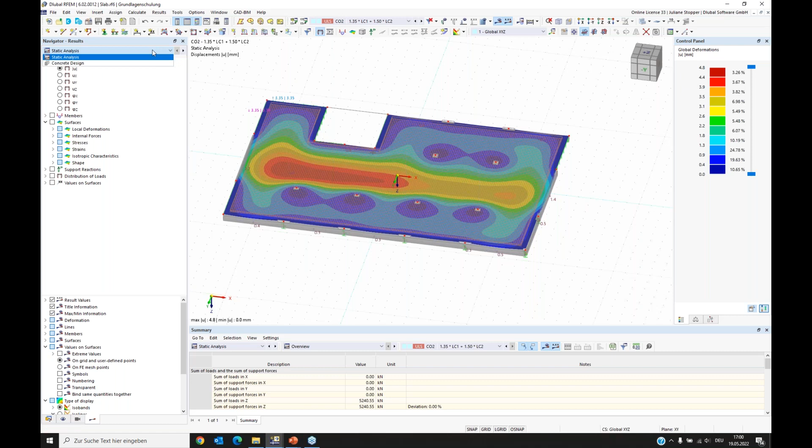So now we can go to the concrete design. I want to now switch off that I can see the reinforcement, as it disturbs the view on the results. I can do all these settings for the display and the navigator for display.

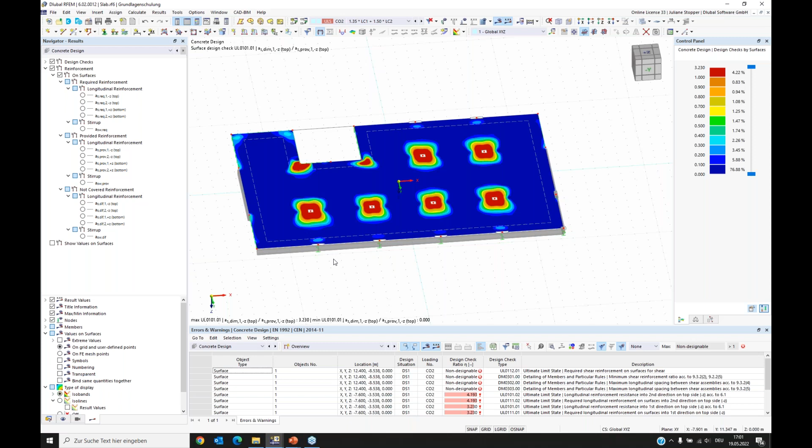And in folder types for concrete design, or in the point types for concrete design, I can switch them off so I don't see any reinforcement, and I can look on it from the Z direction.

So now we have our first design results, and at first I want to show you this. This is the overview for the design, and it generally at the beginning doesn't look very friendly, as here all the problem points are listed. You see a lot of red at the beginning, but this will change.

I can say that I don't want to have this overview. I want to see now, for example, design ratios on surfaces. And if you have more surfaces, you can also set that you want to have it separately for each surface. But we have only one now, so this list is fine for us.

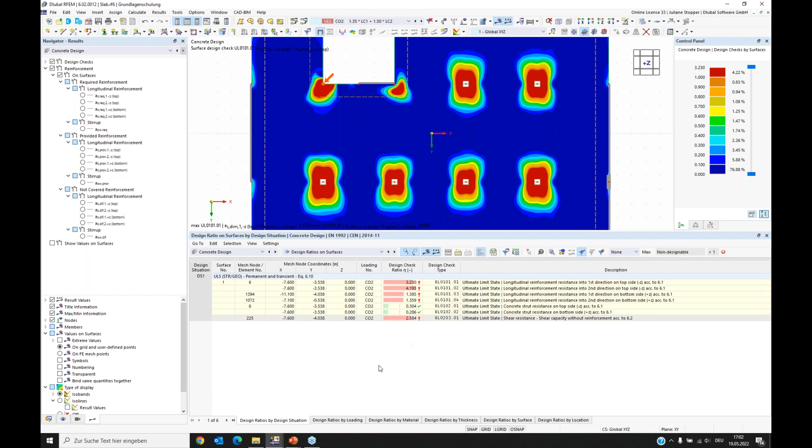Here we can set which design checks we want to see, which design check types. Now we have the ultimate limit state active, and here are also detailing proofs active, but I don't want to have a look at them now. We only want to at first check the ultimate limit state, which is also the much more important thing.

Okay, so now we can have a look at the navigator results a little bit more in detail. We have two main things that we can look at: we can look at the design checks or at the reinforcement. At first, I want to have a look with you at the design checks for surfaces.

And we are now looking at this one, UL0101, which is for longitudinal reinforcement in the first direction on the top side of the surface. This is something we can imagine and expect. We have the highest ratios around the supports. So we have here at the top of the surface the tension around the supports or above the supports. And the same is in the second reinforcement direction, we can see.

And now we can guess what will happen if we look at the bottom side of the surface. Here we can see that we have the most tension and the highest ratio for these checks in the fields of the surface, as there is the tension at the bottom.

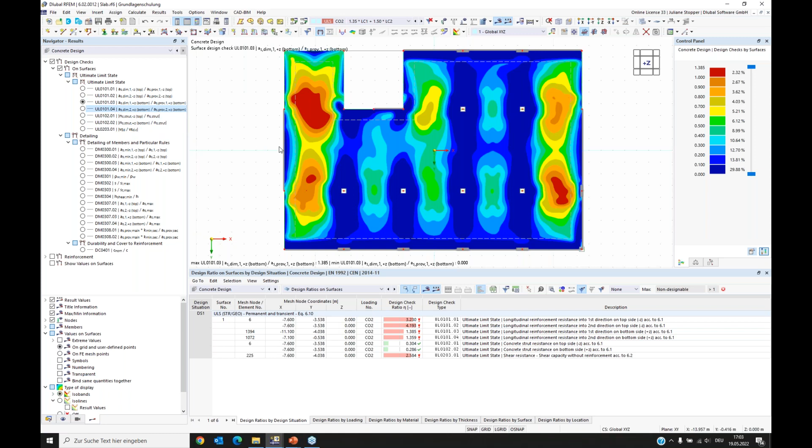Okay, these were the results of the design checks. And now we can have a look at the reinforcement the program calculated with doing these design checks. We can see which reinforcement is required from all these design checks the program did.

And we can have a look at the top. Here we can see how many centimeter square per meter is needed for the top in direction 1 and direction 2, and also for the bottom of the surface. What we also can see is which reinforcement we provided. We put reinforcement in there, and here we can see it. It's 3.35. We put this in each direction at the bottom and at the top.

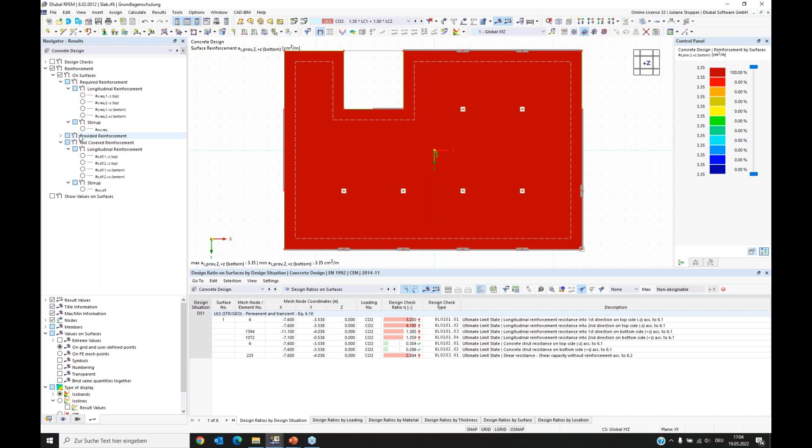And the program also gives an overview about the not covered reinforcement. So we put some reinforcement, and it compares the provided and the required reinforcement, and shows where our provided reinforcement is not enough. There we can see at the top of the surface, in this area, we don't have enough reinforcement in this direction, and in the second direction like this, and here in the fields.

So the first step that I want to go with you is changing the bottom surface reinforcement. Therefore, I go back to the data navigator. Before, I went to the design properties by clicking on the surface. Now I want to show you that all these concrete design settings you can also find in the data navigator.

We have here the types for concrete design, and here all our reinforcements in the whole model. And here we have the configurations for the concrete design.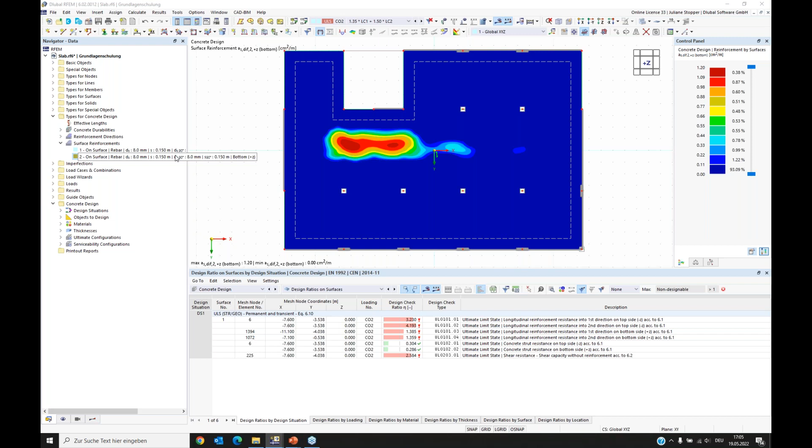But now we want to change our reinforcement. The second reinforcement is for the bottom. I double click on it and I can edit it. Now I want to put the diameter 1 centimeter at the bottom of the surface. I say OK, and the program gives a warning because our design results will be deleted since I changed the reinforcement. It's OK for us, and I can recalculate the concrete design.

Now we can have a look into the not covered reinforcement, and we can see I put enough. We don't have any problems at the bottom of the surface. Now we want to care about the top. I didn't change something yet in the top.

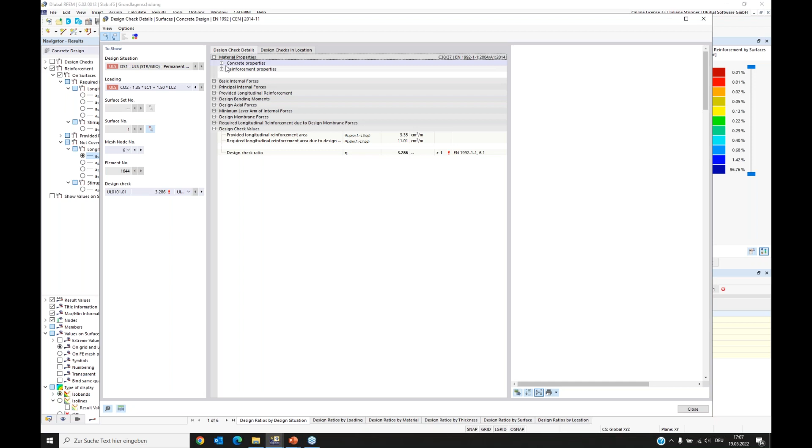What you always can do is go here on the design ratios, and you can have a look at these positions where the ratio is too high, like Daniel showed. You can double click on the design check type and compare it with analytical solutions or hand calculations. You can check everything that enters into the design check for the concrete design, and follow the standards and equations, as we always write from where this equation comes, and compare it. It's really comfortable to follow what our program is doing in this concrete design. You can find all these values that you need, everything that you did.

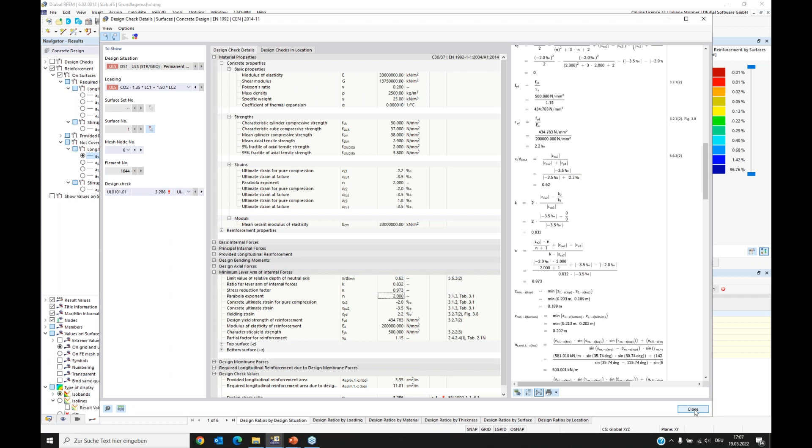Each formula is listed here. When you check this and agree that more reinforcement is needed, you can also put some local additional reinforcement, and we will do this now for these support places.

We go back to the data navigator again, and I do a right click on surface reinforcement and say I want to create a new surface reinforcement. Here we have the type, and now I don't want to put reinforcement on the whole surface. I want to use a free rectangular reinforcement. The material is automatically entered here.

What I want to do is apply a reinforcement only on the top, as I have the tension on the top, and I want to have it in both directions. I will put 16 millimeters with a distance of 10 centimeters in both directions.

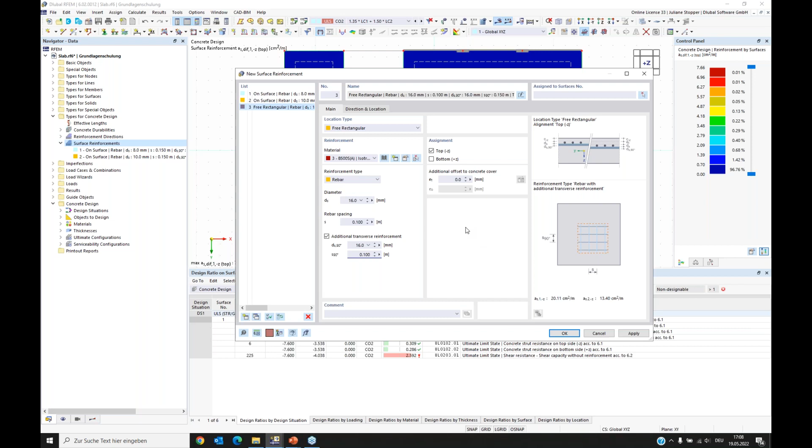So here you can set the dimension and the material for the reinforcement, and here you have to enter the position of your free rectangular layout of the surface. You also can enter which reinforcement direction shall be the first, but we can keep the default settings.

What I want to do is tell the position, and I prefer this setting now for our problem. Here I can enter the center. I can pick it on the working window, and enter the dimensions, and I want to have 3 in this direction and 4 in this direction. It's going to be assigned to surface number 1.

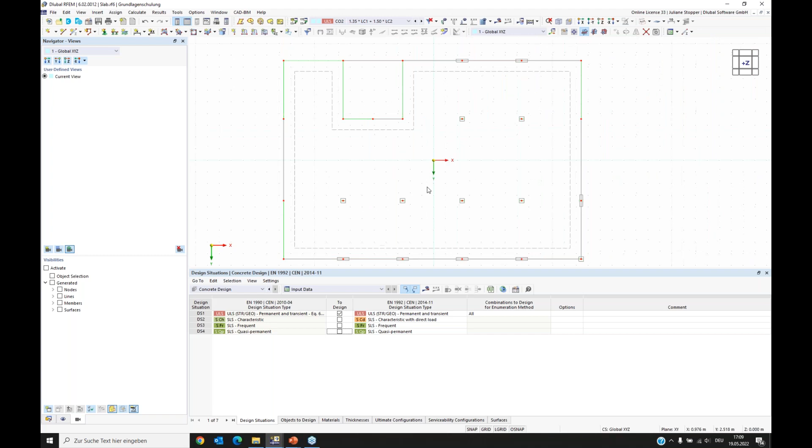I say OK. The warning comes again, and I don't want to see results now. I will also use the wireframe view, as I want to show you the reinforcement. Therefore I again activate the types for concrete design.

Here now we can see we have the surface reinforcement still, and we have some additional reinforcement there. I can also switch off the surface reinforcement of type on surface, and then I can see only my additional reinforcement.

I didn't want to have it like this. I want to have it with 4 meters and 3 meters, I want to have it like this. Okay, and now I want to copy this. As I see the distance, I want to have this additional reinforcement at all supports.

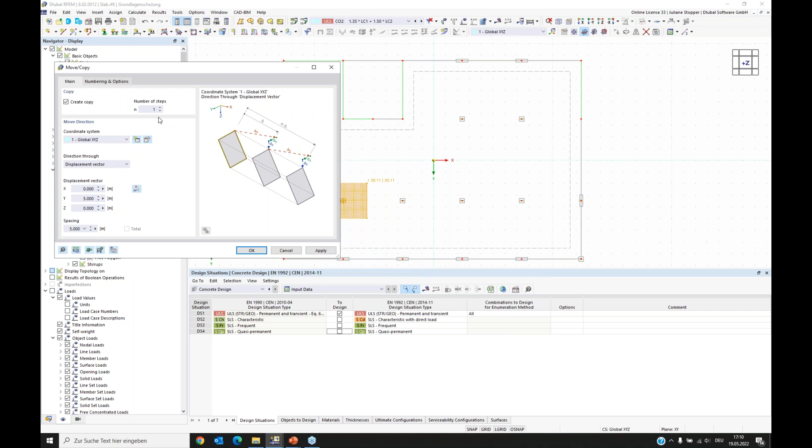So I want to copy it here and here, and the distance is the same. So I can use this thing, I can use move and copy and say create copy, but not only one - I want to have 3 copies now. And I can tell the displacement vector it has to be a distance like this.

And I can say OK, and now my 3 copies are directly generated. And I want to also have a copy up to here.

I need here some additional reinforcement also at the corners. So I do - yeah, now it's only 1 because I don't want to have more in the next row. I give the distance, it's the same like from here. No, I cannot do it like this - the displacement vector has to be from here to here. Okay.

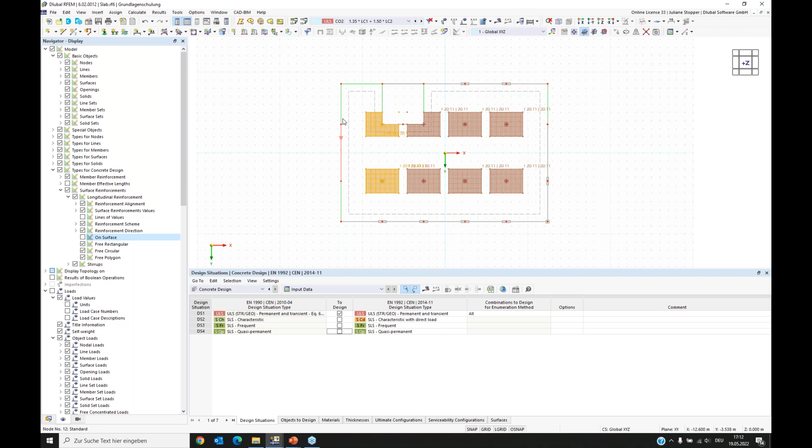And also I want to put here some additional reinforcement. It's due to the change of stiffness. We have here the supports, and here's no support. Here's the L-beam, and again here comes supports. We also have some singularities here. So I also put a copy there.

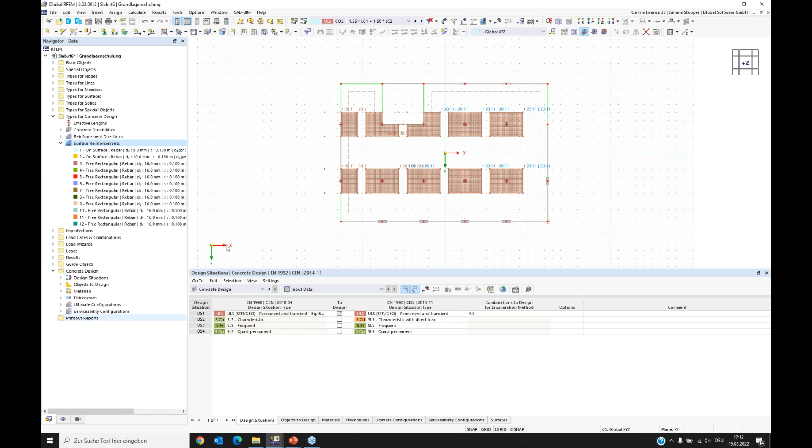Okay, so this is it. Now we can again calculate it and check the results.

I again switch off the reinforcement, and we will go into the design checks and check the top. I have to switch on the design checks, can switch off the reinforcement, and now we see the first direction on top, and also the second direction at the top.

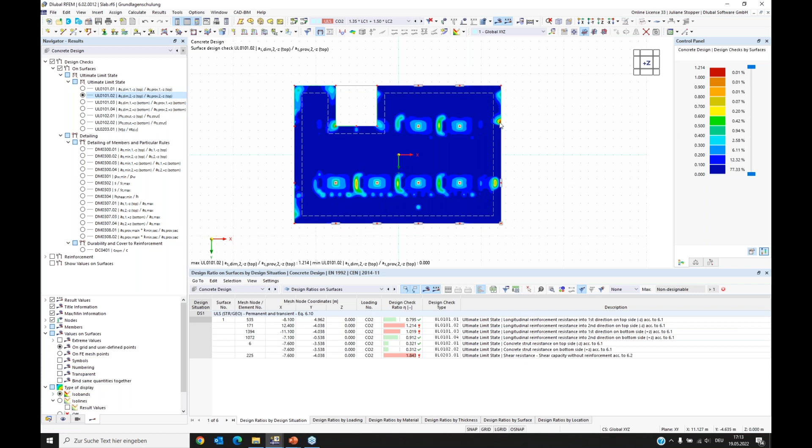We see that we have at very small places some higher values, but mainly we fulfilled the requirements of the standard with our additional reinforcements. So I want to now keep this design.

I only want to show you a last thing. You can also change the type of display. When you want to print it, for example, it's not very comfortable if you have so much color in it. Here in the navigator results at the bottom, you can change the type of display, for example, to isolines.

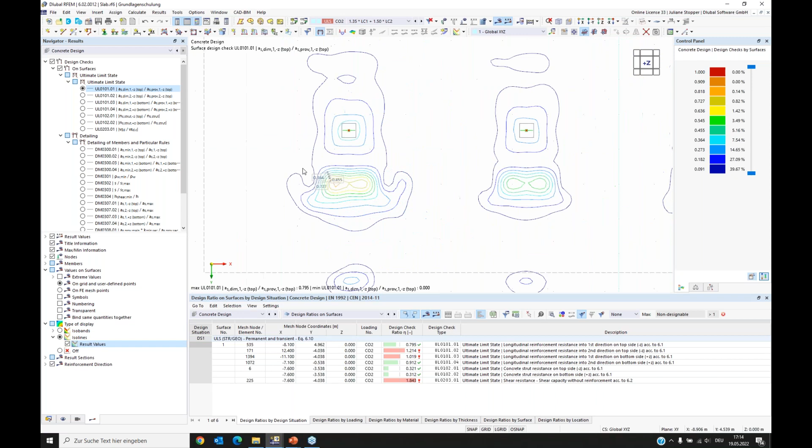You can say that you want to see the result values. Then you have the values for each line, and it's more easy to print into your report or something. And we have another option which is comfortable for this: you can show values on surfaces.

Now it's a bit crowded, so we close this. It showed so many values because it shows the values dependent on the grid within this setting. And the grid we can change in the surface here. We can say we want to have a grid with bigger distances, so there will be less values shown.

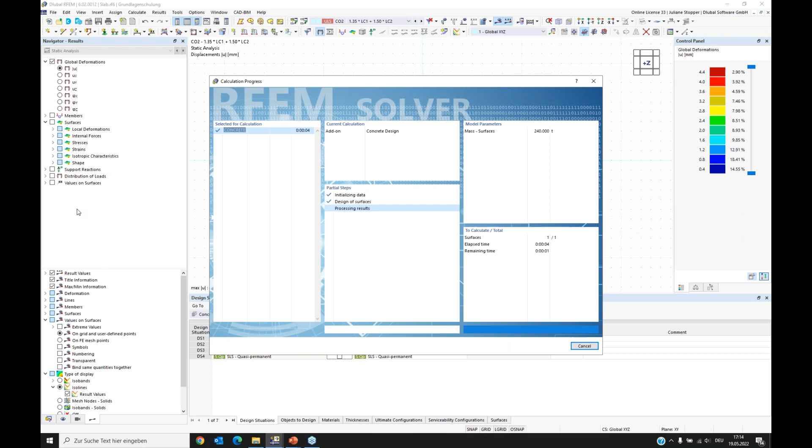And we can shortly calculate them, and then we can also use the values on surfaces, which is nice for printing it, for example. Okay, so this is it. This is what I wanted to show you as an introduction into the concrete design for surfaces, for slabs.

Yes, I would like to give my word back to you, Daniel. I think we learned a lot.

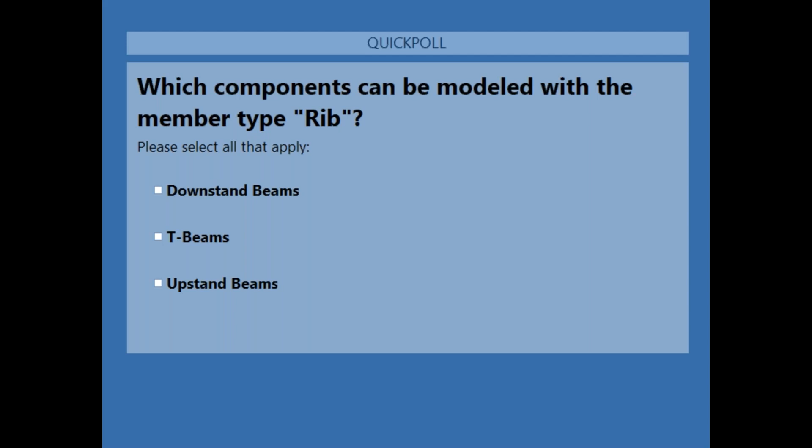Okay, so most of you have voted. I close this, share the results. So all three questions are correct. With the member type Rib, you can design downstand, but also upstand beams and T-beams. When you want to consider the integration width, you have to use and consider the member type Rib.